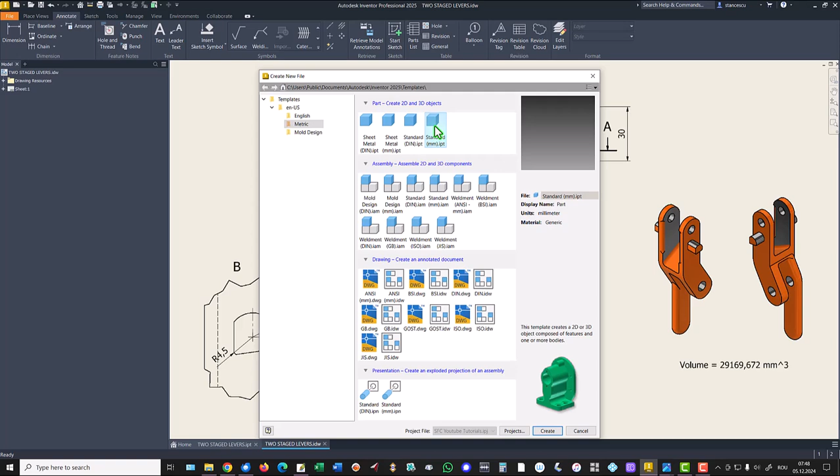Being two levers, we start with this one. You see the contour. Dimensions are here: 51, radius 9, radius 20, 20 here, radius 25, dimension of 38 for this point, and radius 10 here. Let's do this. New standard millimeters IPT, new sketch.

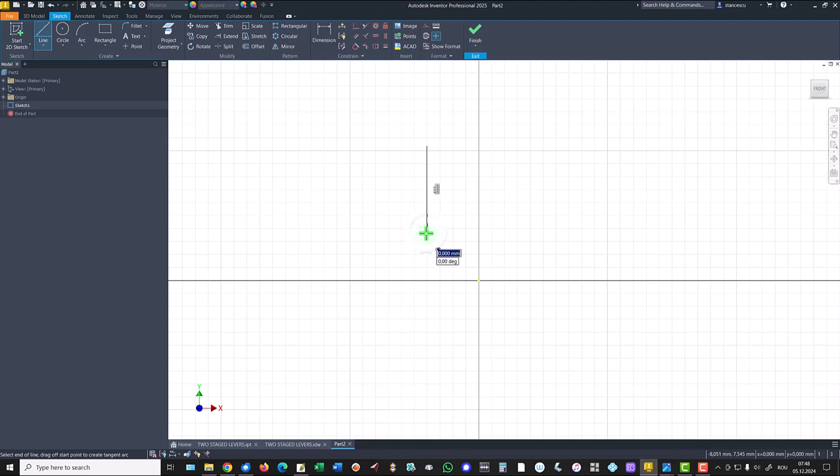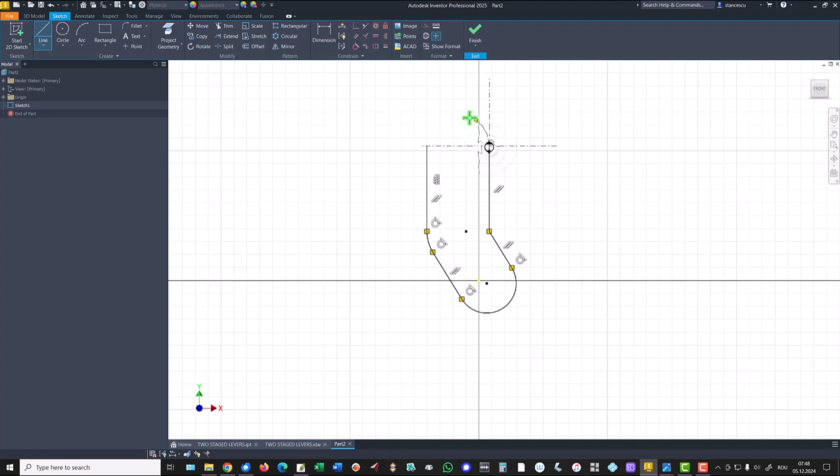We draw some lines. I start from here, going down. Keep pressing the left button, continue with the tangent, keep pressing the left button, go here, then up, and we close with the last arc. This point is over the center point. The angle is 30.

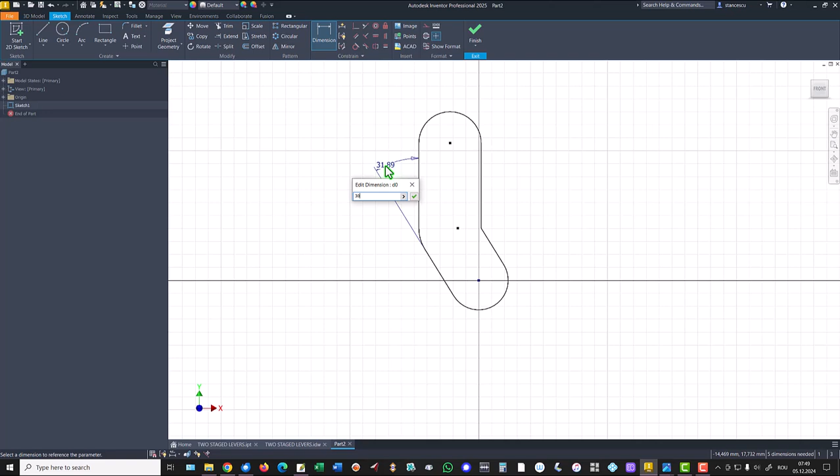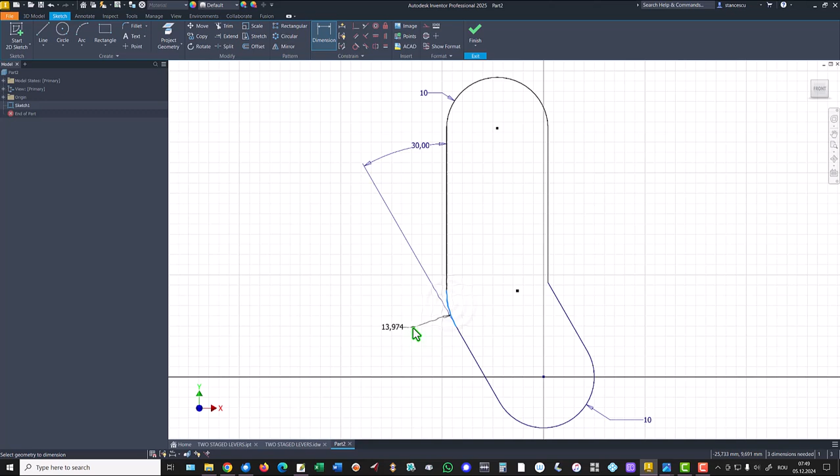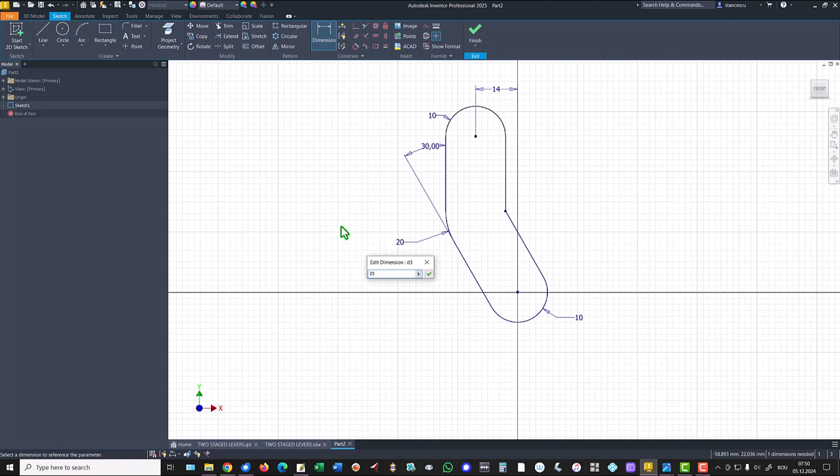Both radius are 10. Now you see the scaled sketch. Again 10, a radius 20 here, 14 is this distance, and not 20 but 25. Then 38 between these 2 points. 38. Finish sketch, extrude on 8. Okay.

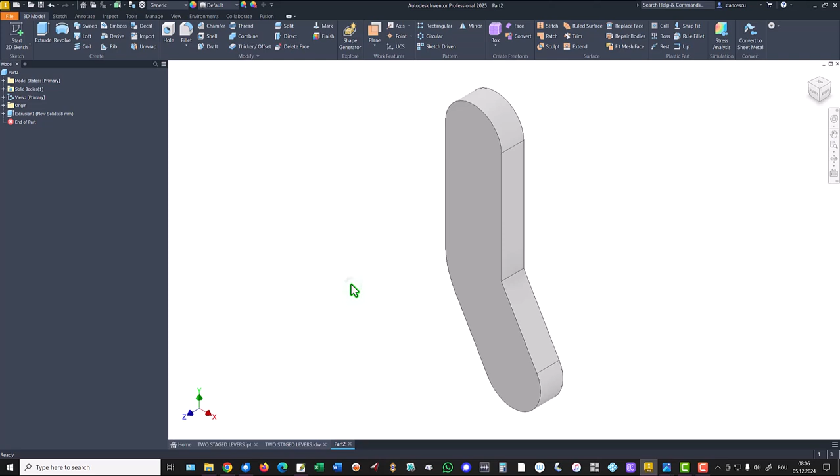Next is the other lever. We see here the distance of 29 from this face to the end. We place a plane at this distance from the face and we create this contour with radius 20 here and so on. Good. Plane 29 with minus and a new sketch.

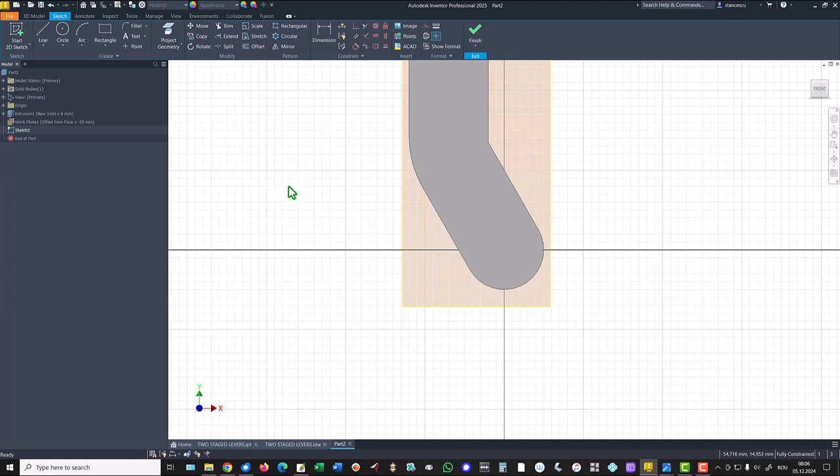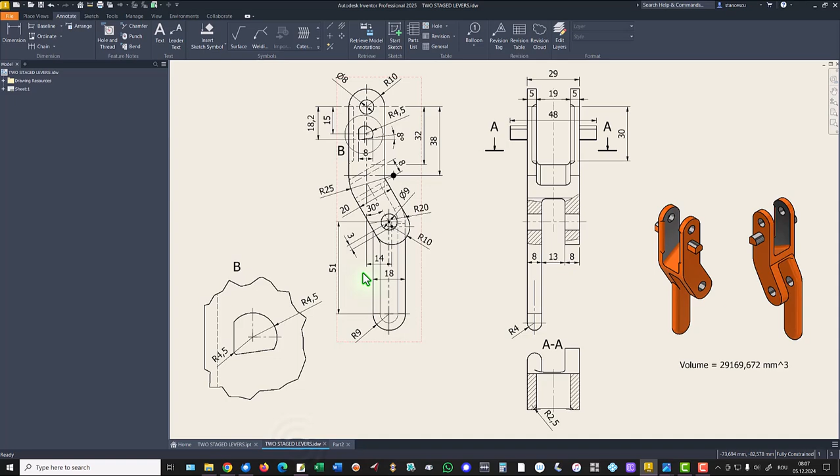The new sketch is based on this face. I project it and F7. Now we see the former contour. There is an interesting aspect here because this point is not the center. This is the center we used. The center point is here. So we have to draw this short line of 3 millimeters at 30 degrees. 30 degrees is already placed before.

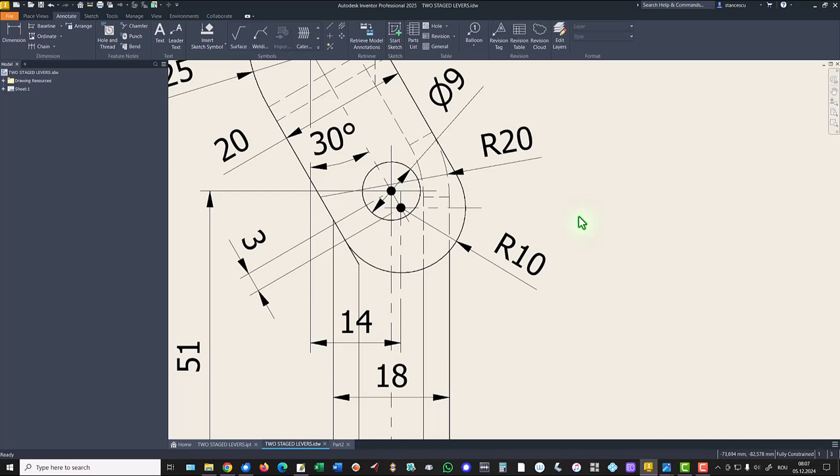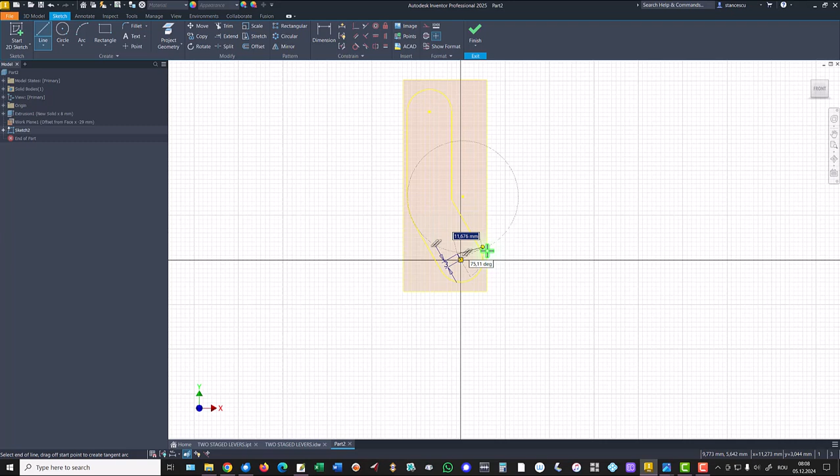Okay, we draw that short line, we hover on this to catch the parallel, and we write here 3. You see the parallel constraint is applied. Then we draw a vertical line from somewhere here. We go back, press the left button, go here and up to this line.

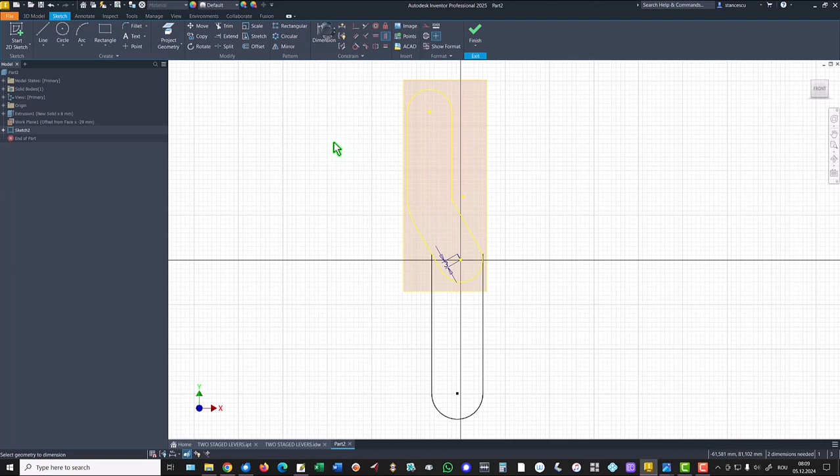This dimension from this end, but let me place on the same vertical this point with this center. The radius here is 9. I draw a line from this point to this end because I have to apply fillet of 20 between these two lines.

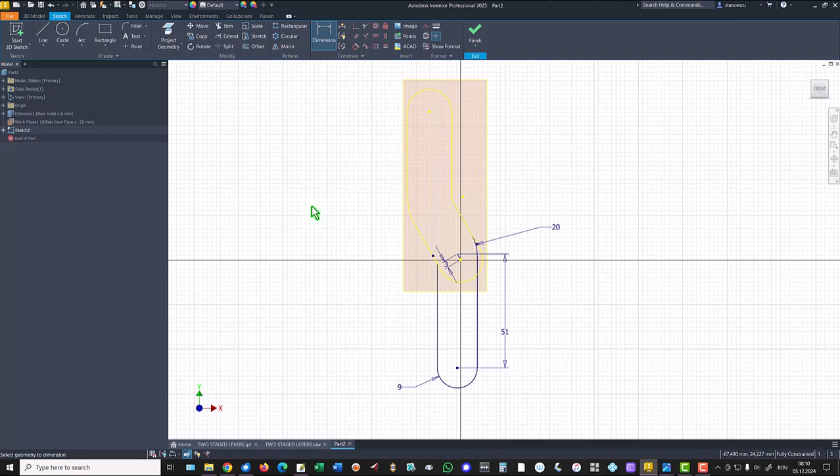One dimension needed, it is the distance from this point to the center. This dimension is 51 in the drawing. We have a fully constrained sketch, finish sketch, extrude both areas, and the value is also 8. Okay, I hide this plane.

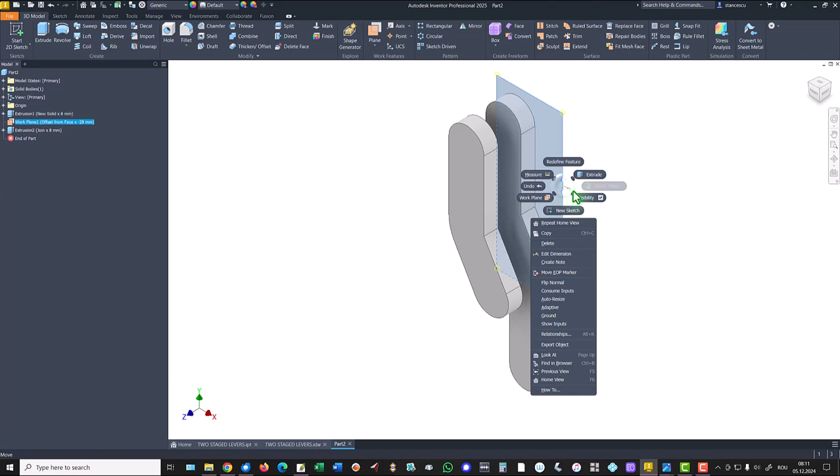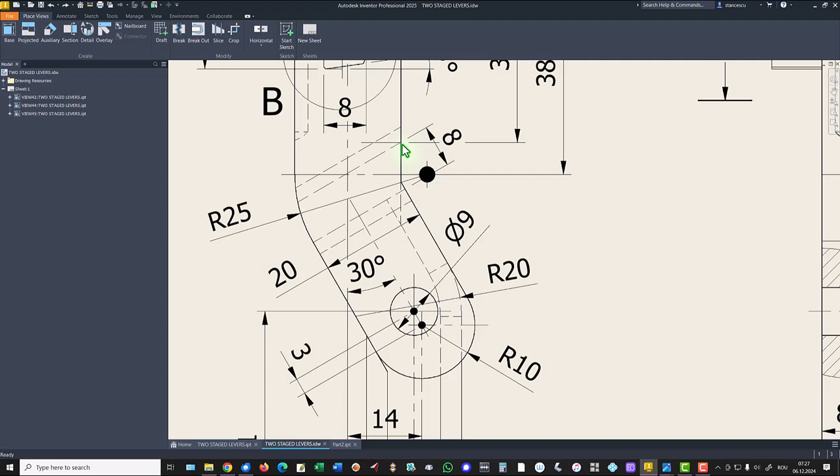Now we have to connect the two features. This is the connection, and dimensions are here. You see 8 millimeters is the thickness, and this point is placed at 38 from the center. Let's create that sketch. New sketch, F7. I apply project for all the contour.

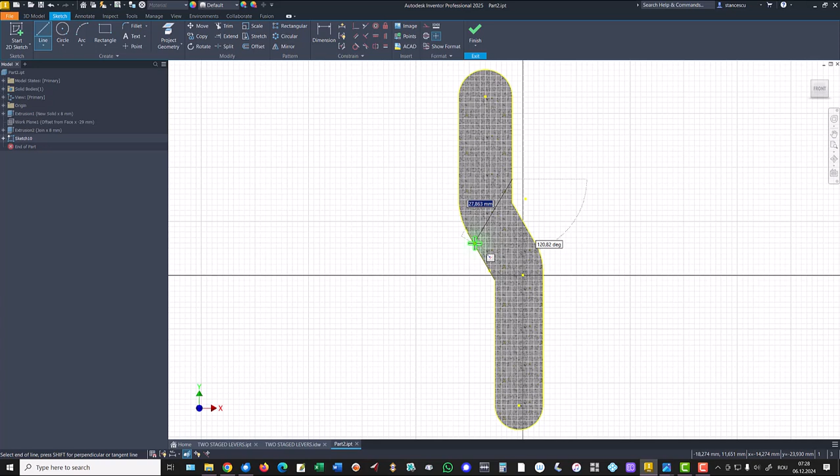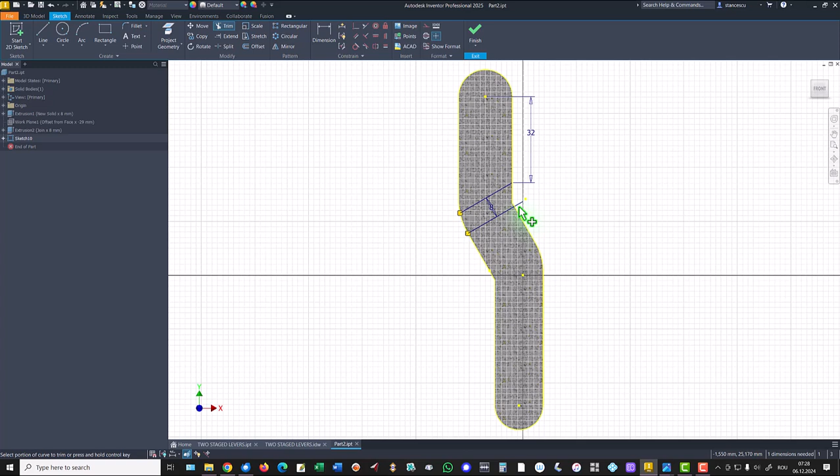I draw a line from this point to somewhere, but I hover on this to catch the perpendicular. This is, you see. Then I apply offset of 8 millimeters. 8. I place the dimension of 32. And I trim all these ends. Now we are sure that we have here a closed contour. Finish sketch, extrude this to the other face. Okay.

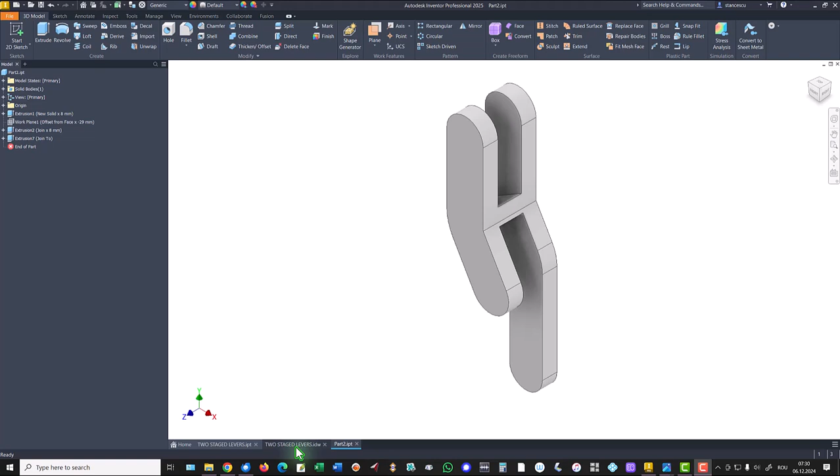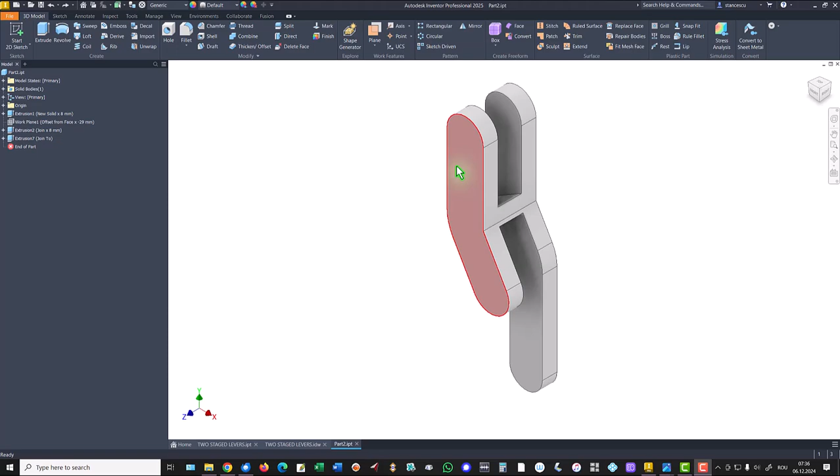The distance here is 13. Here is 19. 19 minus 13 divided by 2 is the difference between this face and this face. Let's create that extrusion. Sketch on this face, F5 to see the previous view, project geometry, this, finish sketch, extrude 19 minus 13 divided by 2, but with cut.

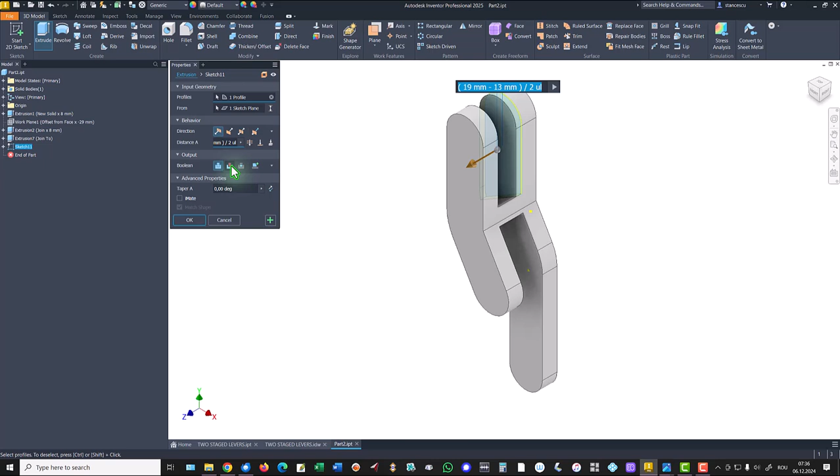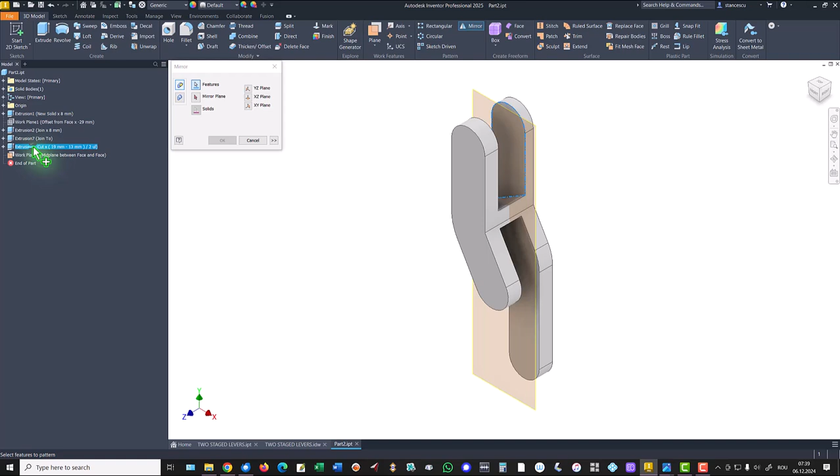Okay. Now we have to apply mirror, but to do this we need a midplane. The midplane is this one. Mirror, last feature about the midplane. Visibility.

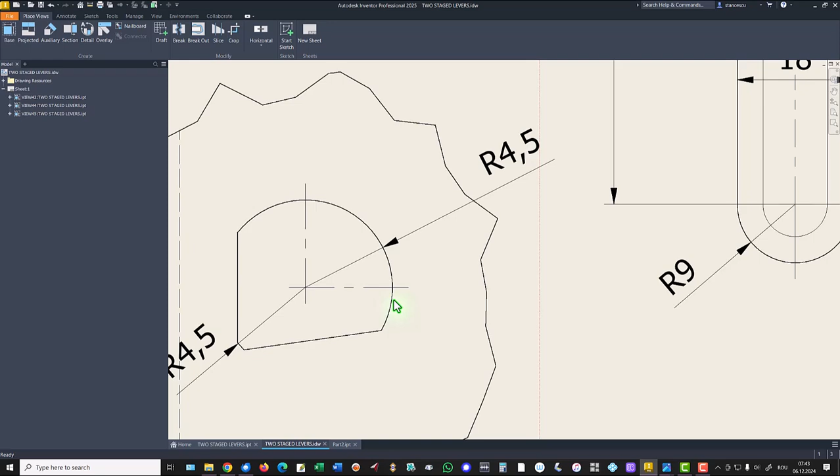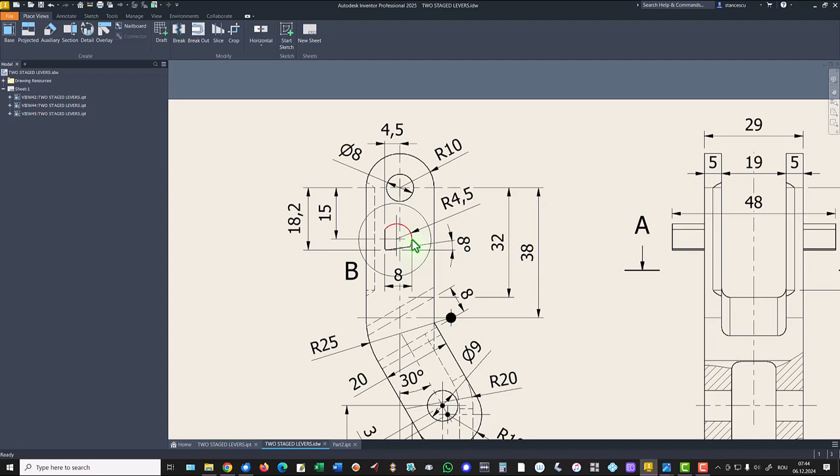We continue with this feature. You see dimensions here and also here. You see this was a circle because this is an arc of that circle, the same radius. Other dimensions are here, 4.5 for this side, 15 for the center of the circle, radius 4.5 for the circle, 8 degrees and 8 millimeters here. Good.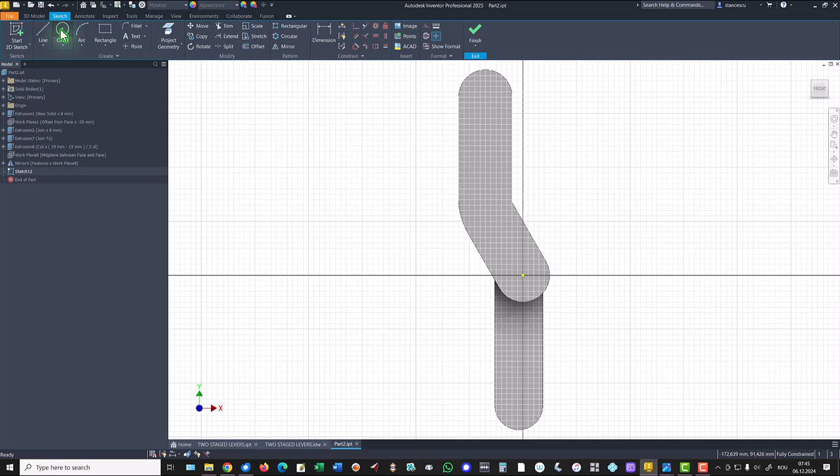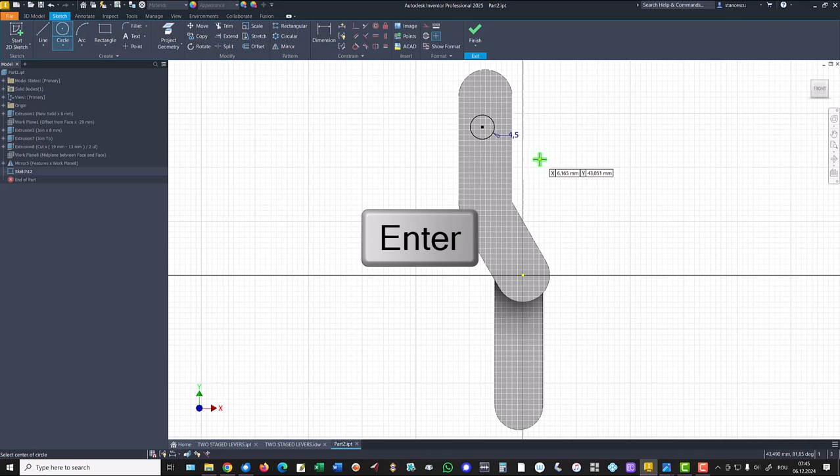We select this face and we draw that circle with the radius. You see, this is the radius. If you want to use a diameter, you select your option from here. Radius 4.5. And then I draw a vertical line, this one.

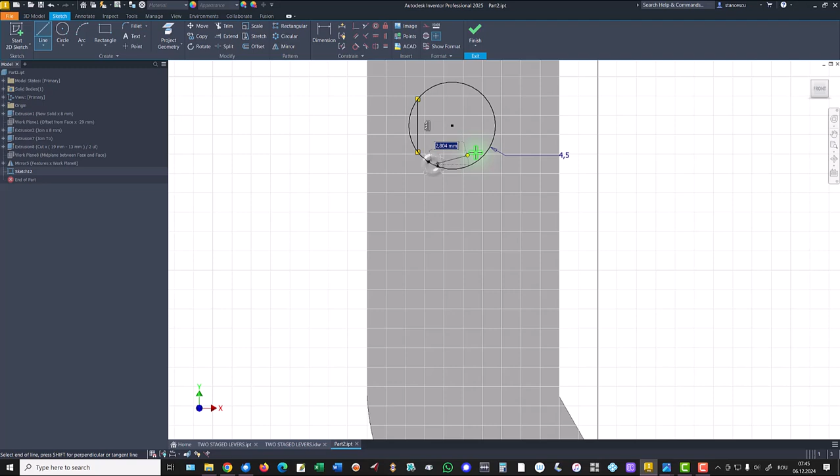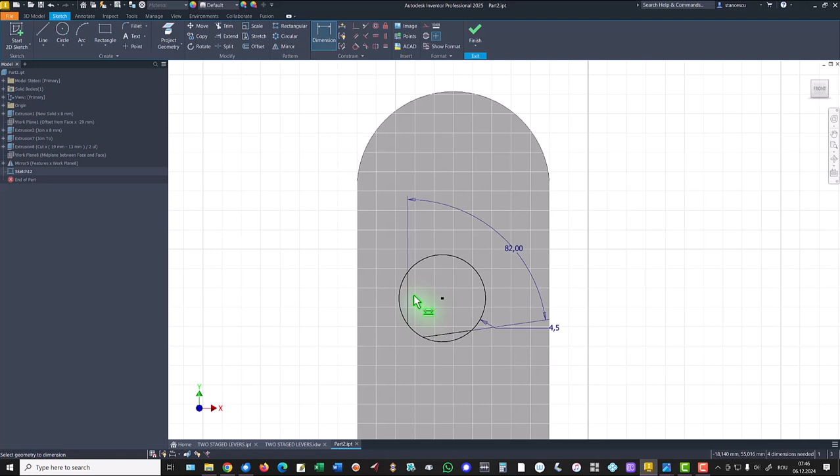You see the sign of vertical, and the other line is this one. The angle between the vertical line and this is 90 minus 8. The distance between this line and the center here is 4.5. Then we know that this is 8.

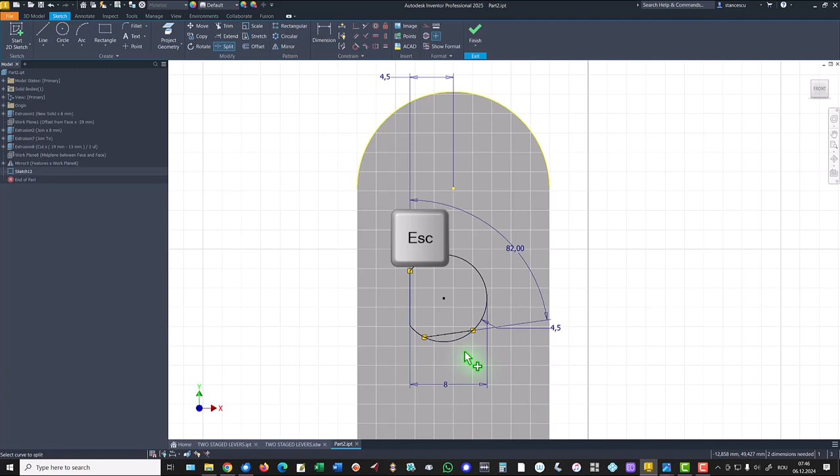We trim this arc, but we don't apply trim here because we lose 4.5. So we apply split. We split this major arc and we make this construction. I can move this somewhere else here, and you see we keep this.

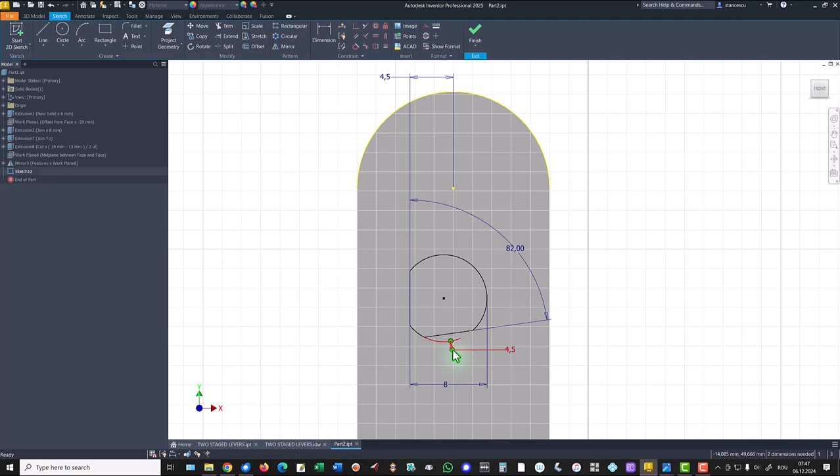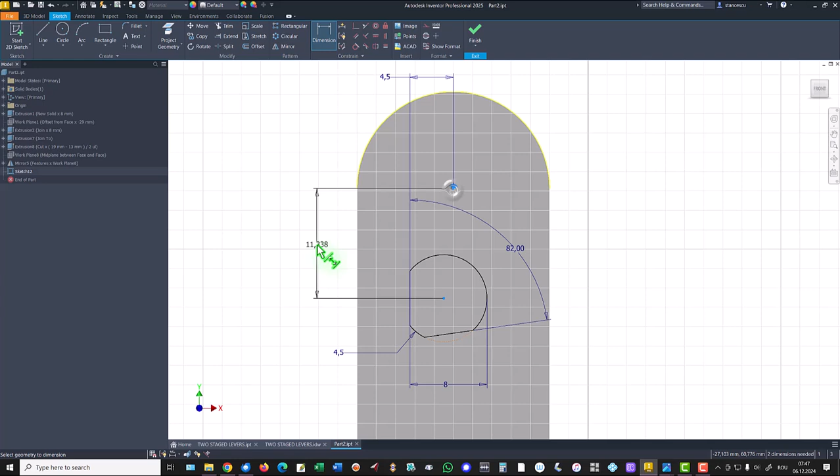You see, I place it here to have no doubt about the position and shape. This distance is 15, and the distance from this very point to the center is 18.2. We have a fully constrained sketch. Let's see what is the height: 48 minus 29 divided by 2.

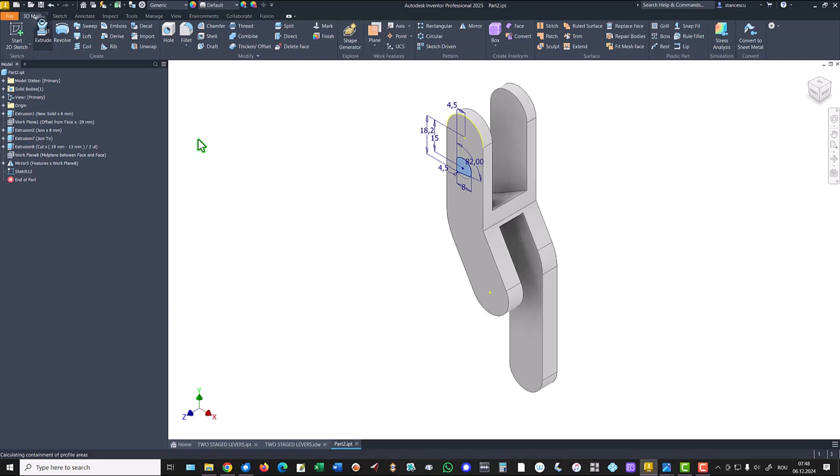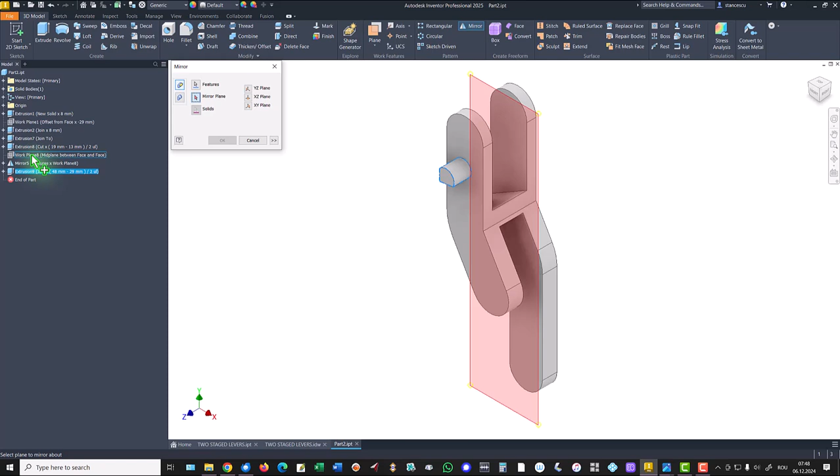Extrude 48 minus 29 divided by 2. Okay. Mirror the last feature about this known midplane, and we have the other extrusion on the other side.

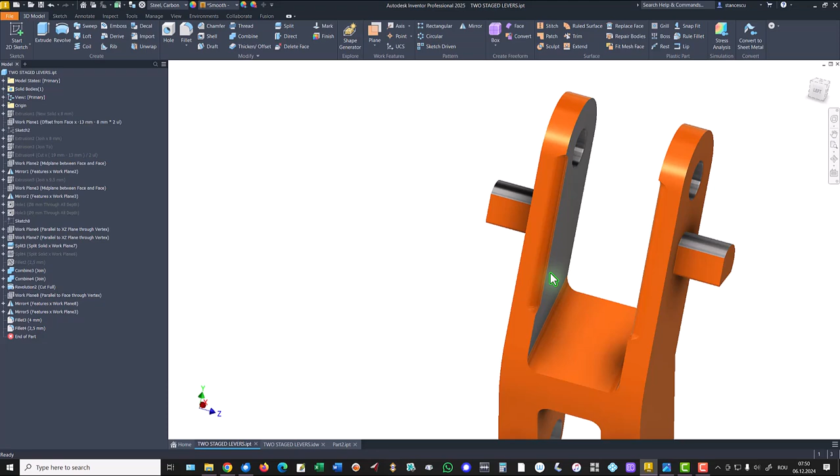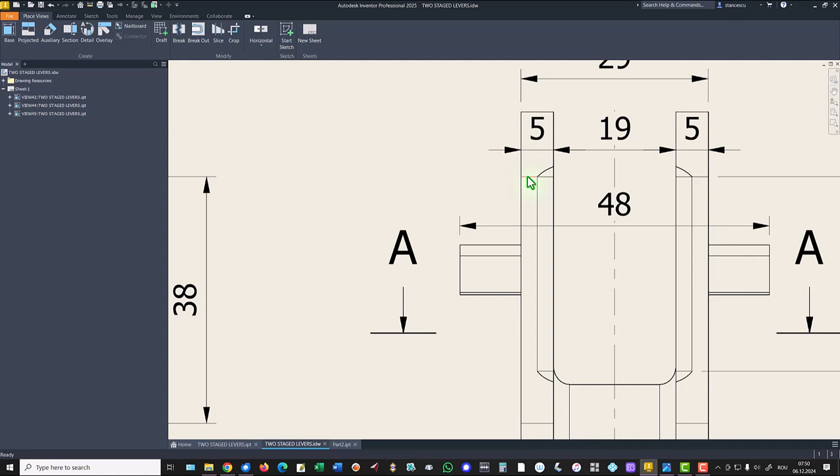The part has two interesting fillets, this one and this one. These fillets are on the other side in this view, and we see here the distance 30 millimeters, but we see that the 30 millimeters is from this center. Yes, this is the projection of the edge. Call this an edge between the two.

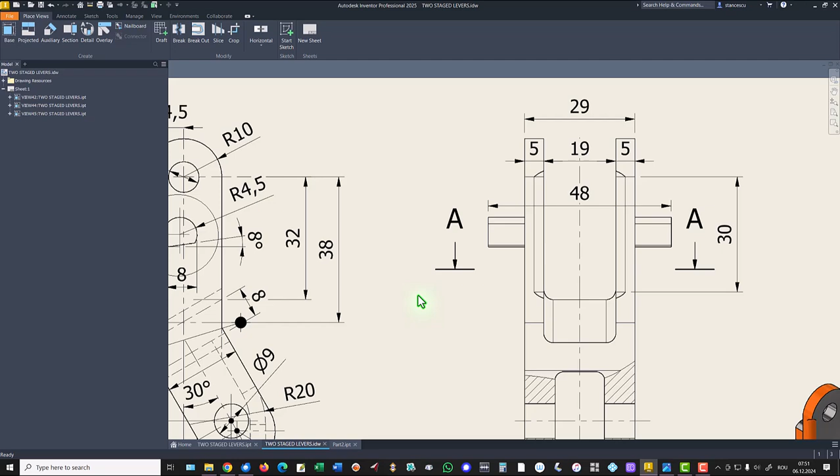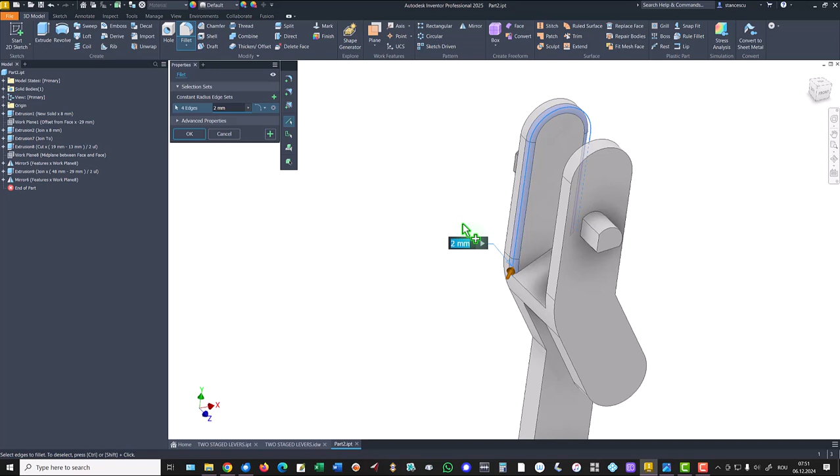Okay, the radius is 2.5. We cannot apply fillet because we cover all the edge, so we have to create a new plane based on this one and containing this point. This is the plane for a new sketch.

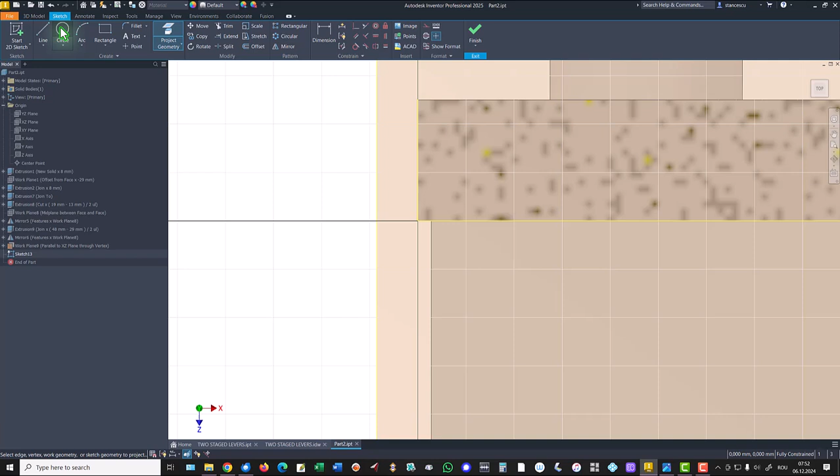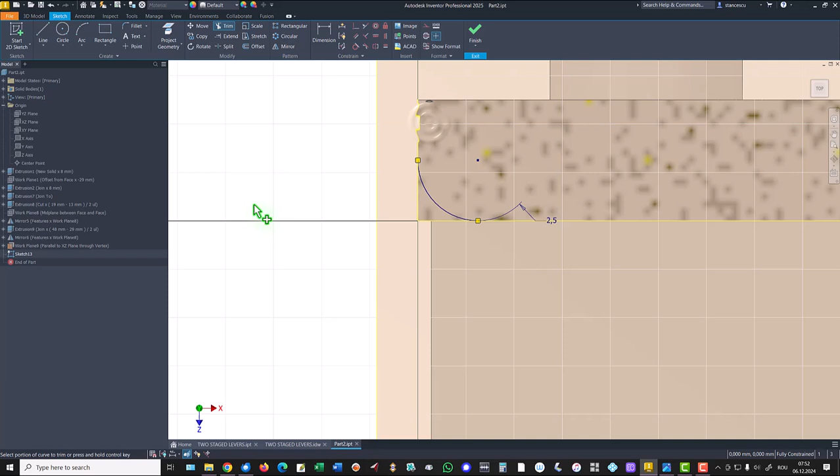I project this line, and also this small line, and I draw a circle with a radius of 2.5. Tangent the circle with this line, tangent the circle with this line. Trim, and we have the closed contour for an extrusion. Extrusion down, and the distance is 30.

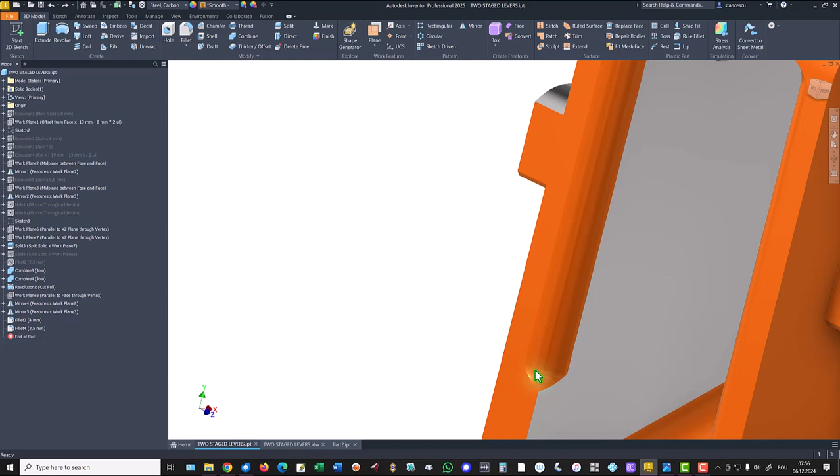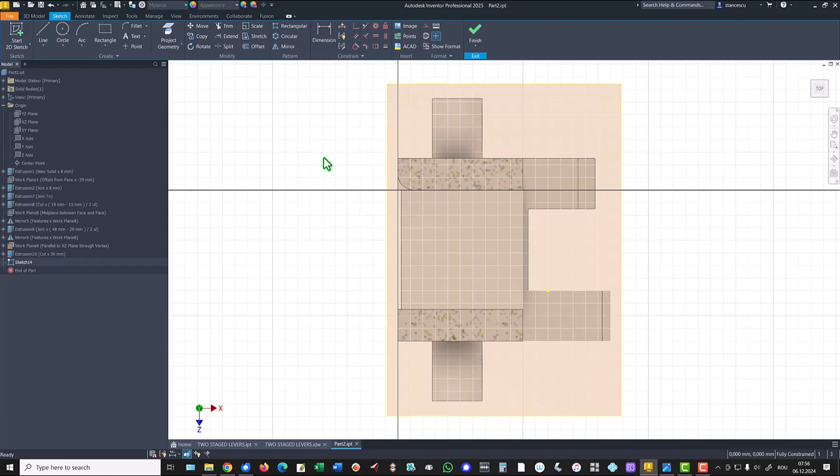Okay, if we take a look at the part, we see that there are other ends here with the radius also 2.5. To create that end, we use again this sketch, Sketch14, and we project this arc, this line, and also this line.

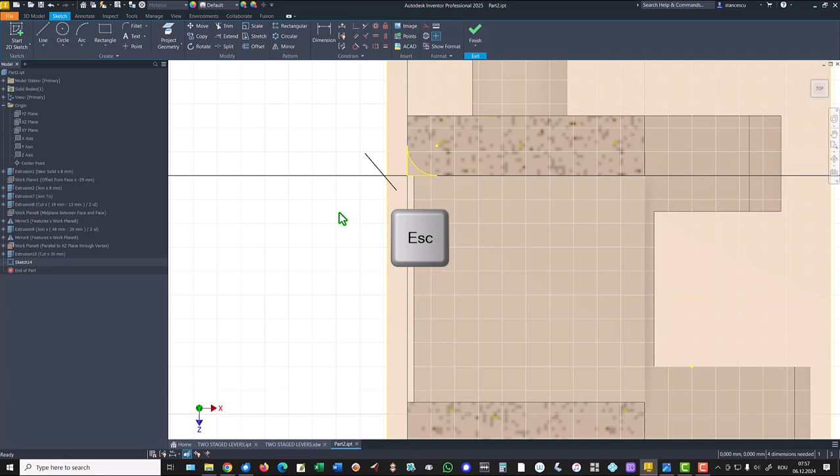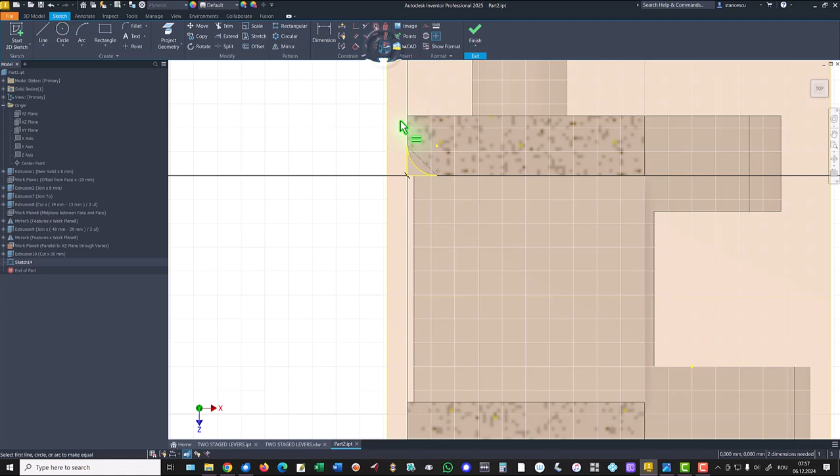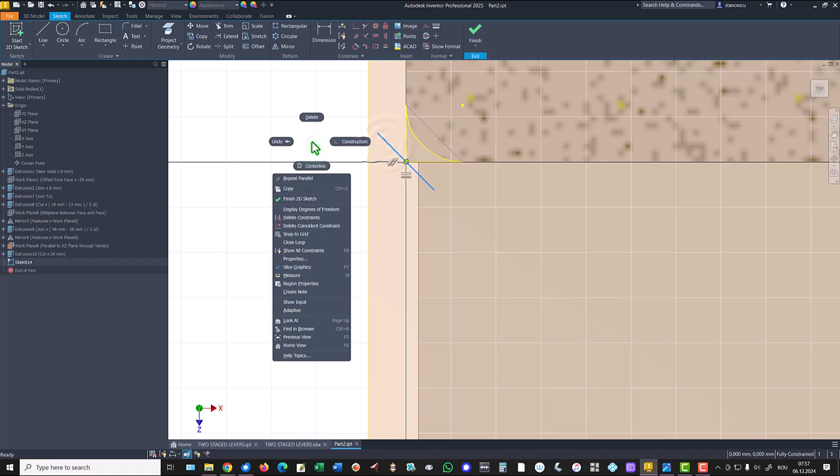Then we draw a line, another line here as a basic reference. We place the midpoint of this line to here. We make equal this short line with this long line and we make them parallel. Yes. Now we see we have a fully constrained sketch. This is a center line, finish sketch, revolve.

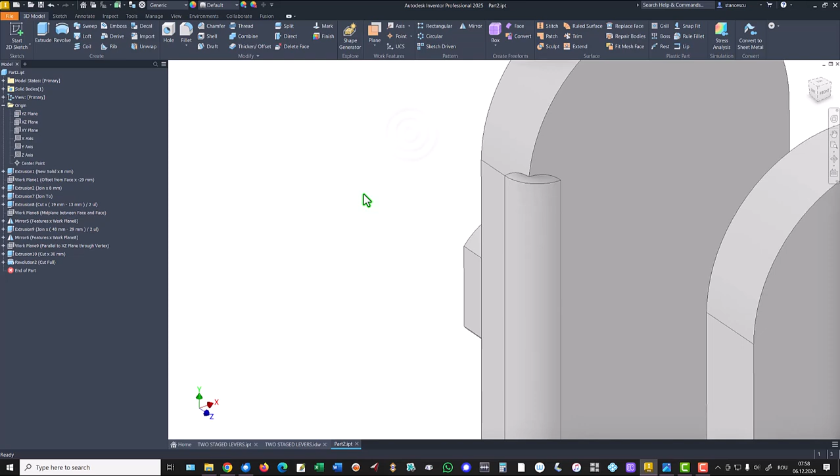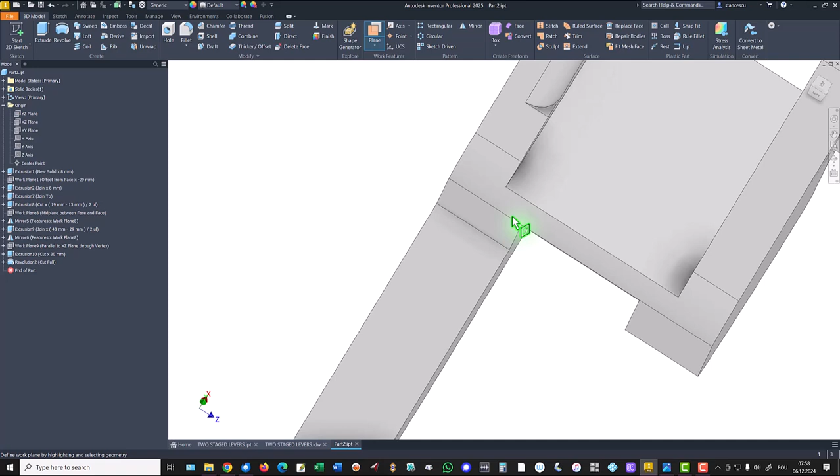You see what happens, yes, but with cut. Okay, visibility, and you see that end. Let's place it also here. We create a plane to mirror it. That plane is based on this, or if you want this, and it contains this midpoint. Yes, we apply mirror of the last feature about this new plane.

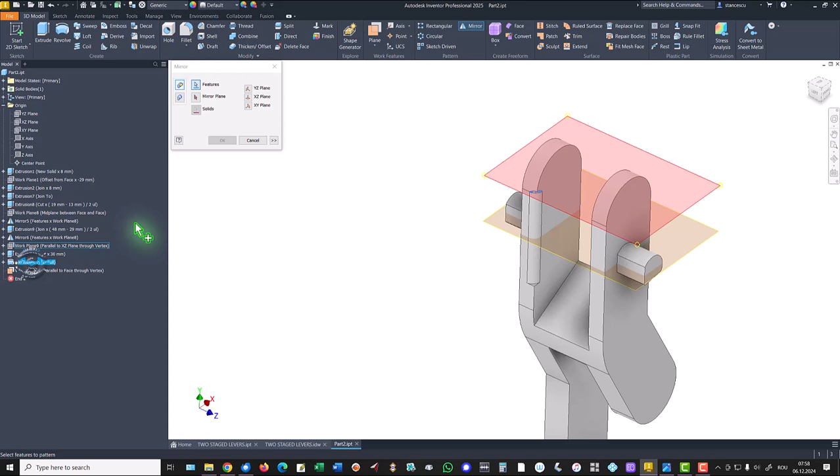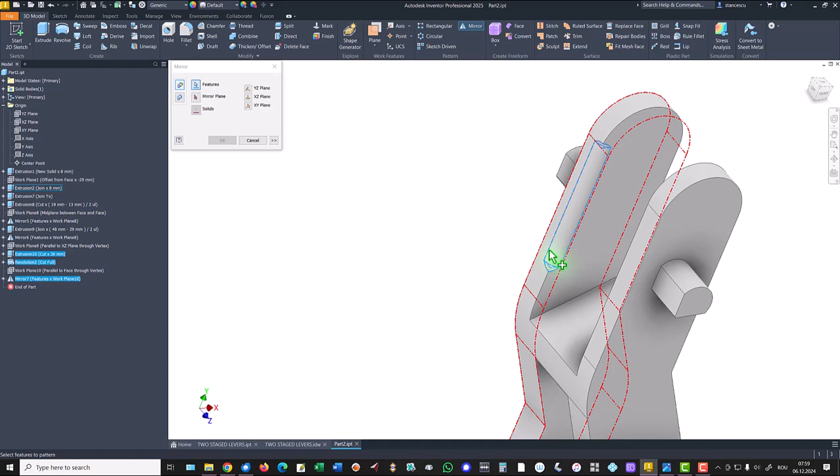Okay, I hide the new plane and I use that mid plane we used before to apply mirror of the last mirror, the other end, and extrusion. All the three features about that mid plane. You see here what happens. Good.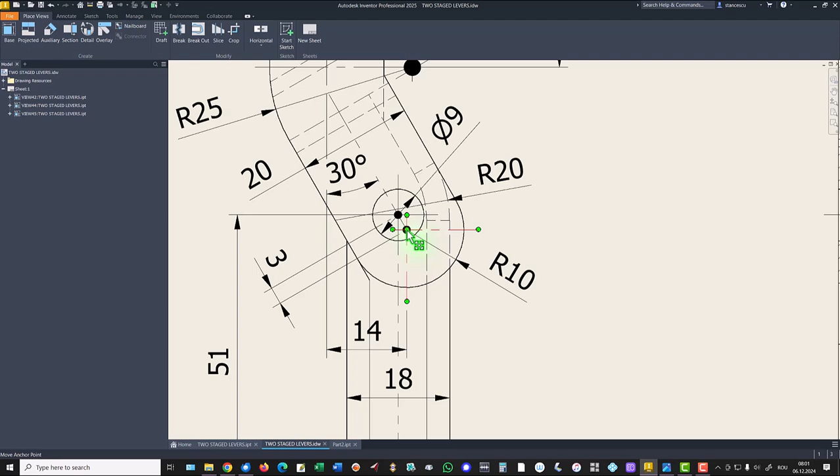This part has holes. You see, this is one, this is another. Both are through all the part. Dimensions are 8 for this upper hole and 9 for this. Here we have to be careful. This center is not coincident with this center. There is a difference between them. Good. Hole. Not threaded. This is the face, this is the center, and the diameter is 8.

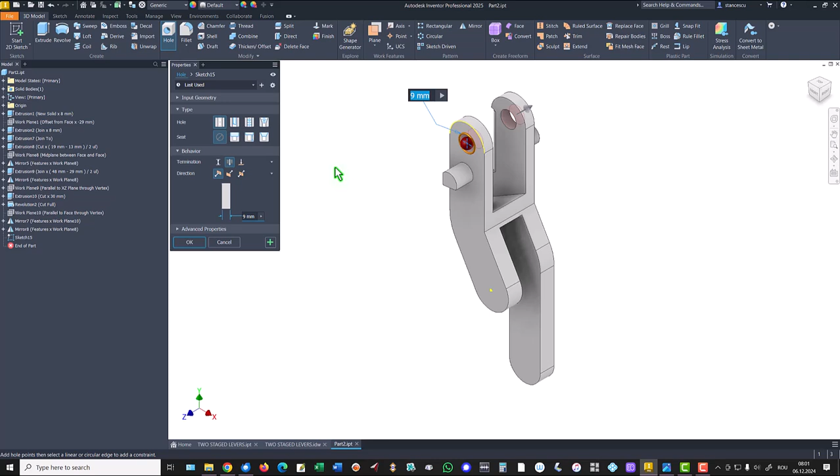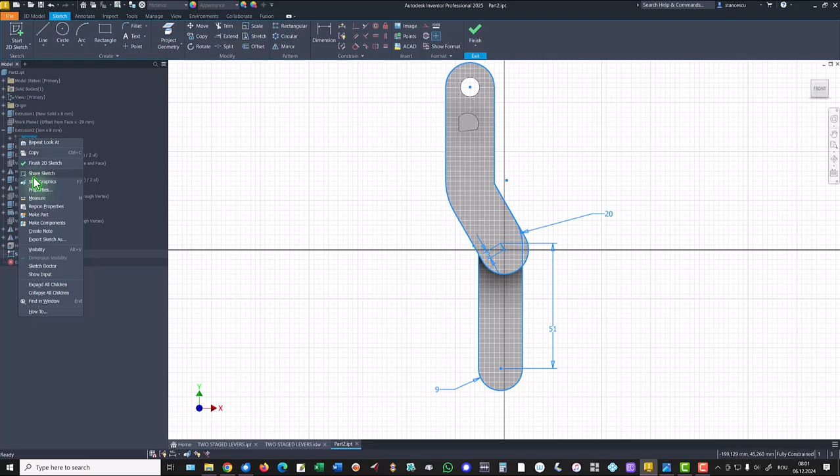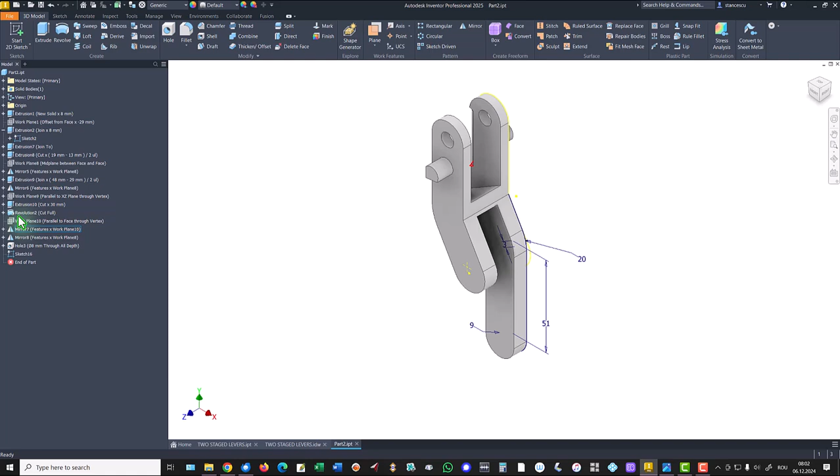Then we create a sketch here by using a former sketch. I suppose this one. I make it visible. I go to the sketch and I project this end. You see, we find this center. Finish sketch. I hide that old sketch and I apply hole. Inventor knows to apply the hole if we use this cross mark, and the diameter is 9. Okay.

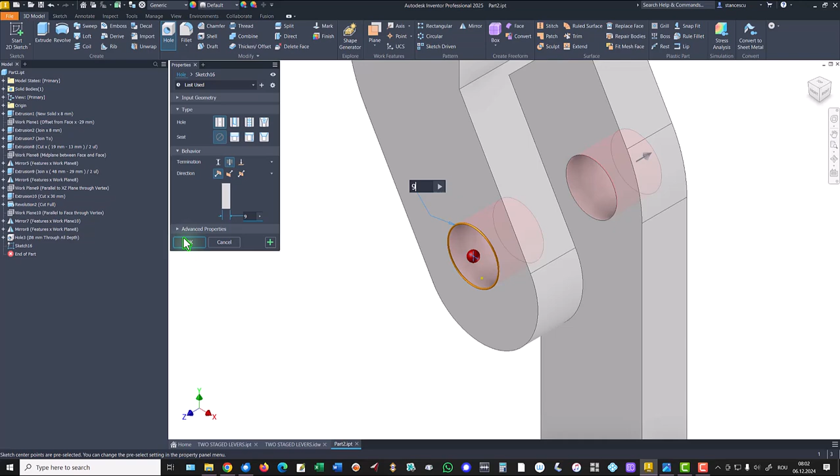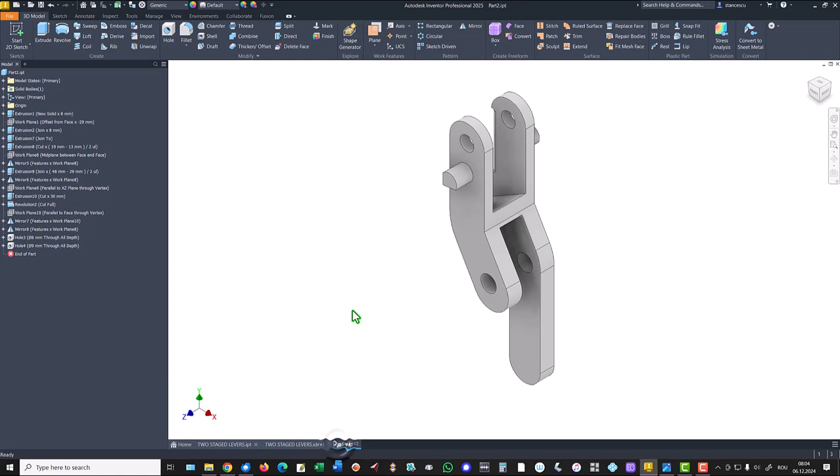We see here a radius 4 for this handle with the dimension of 8. And we also see that undimensioned fillets are radius 2.5. We place here a radius 2.5, but we have other fillets, you see, to use this radius 2.5. Down and up. Good. We select this edge. We apply 4 millimeters to both edges, then plus here with 2.5. Okay.

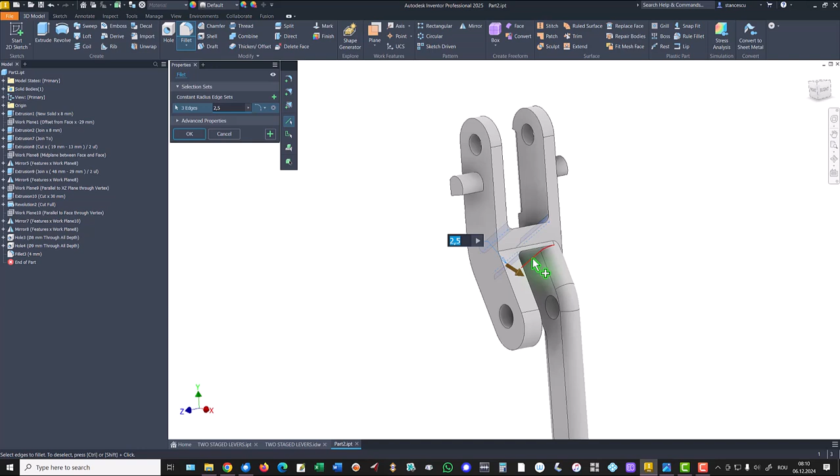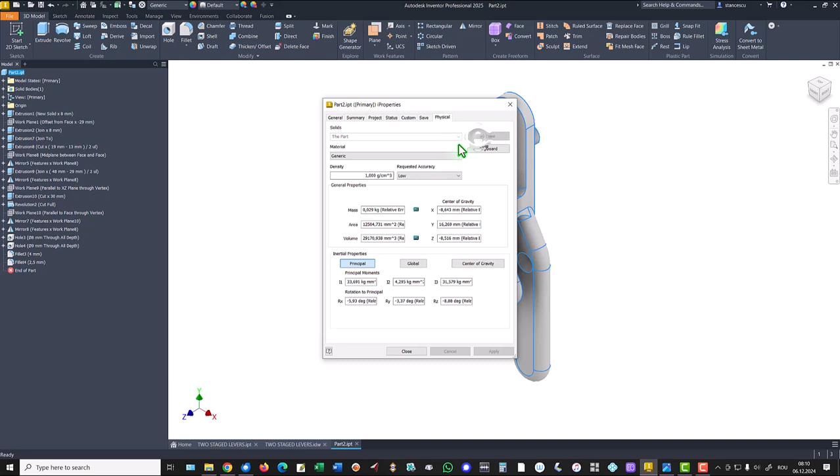I suppose we finished this part, this model. Let's see what is the volume. Copy, close, drawing, double click, and the new value is almost the same, my friends. This is 70.9 and this is 69.6.

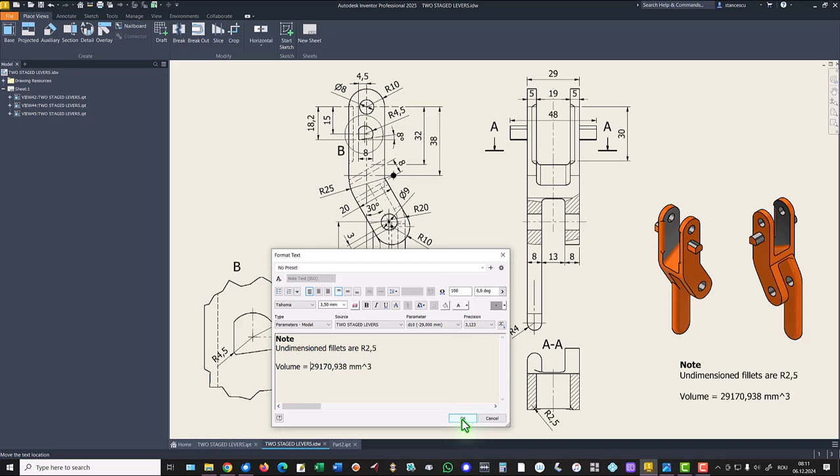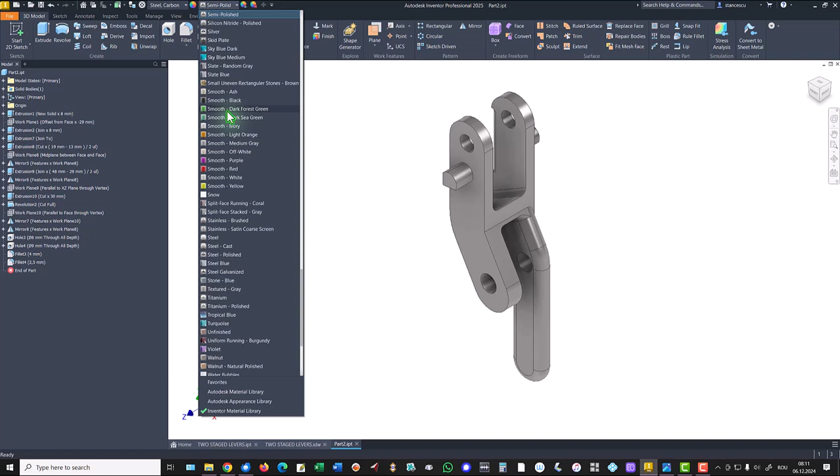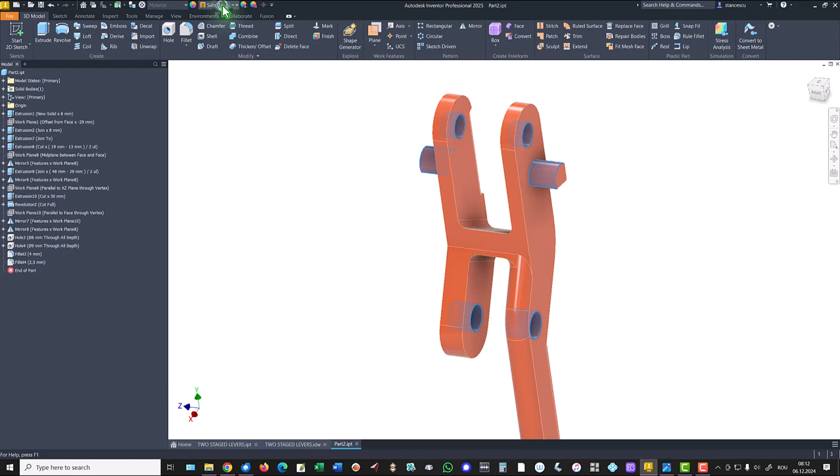We select this color. We apply some machined faces. Those ones, you can add any other one. This is steel polished. I hide the edges. I change the view, the lights, and we can compare the two.

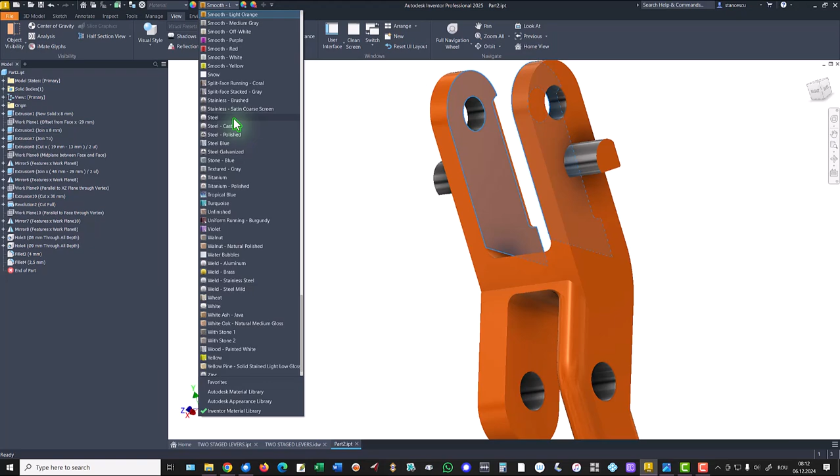Oh, there are also machined these internal faces. Steel polished, steel polished. Once again, comparison is the same. Good. That's all for today.